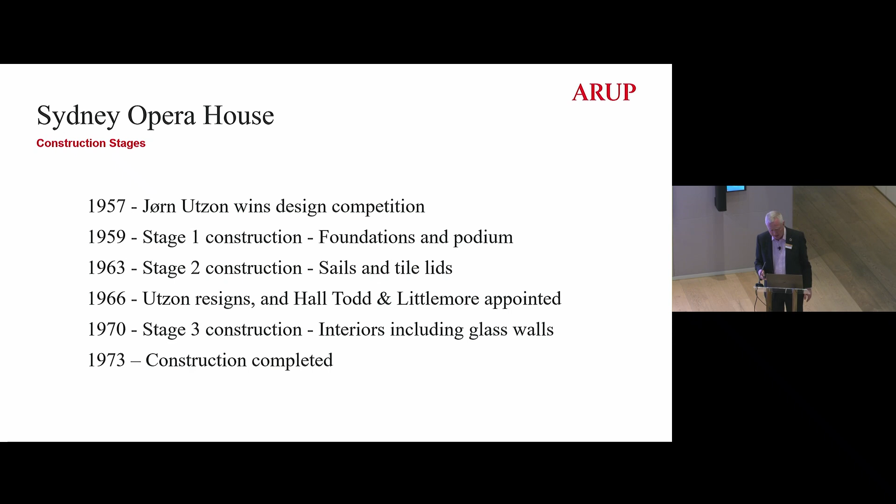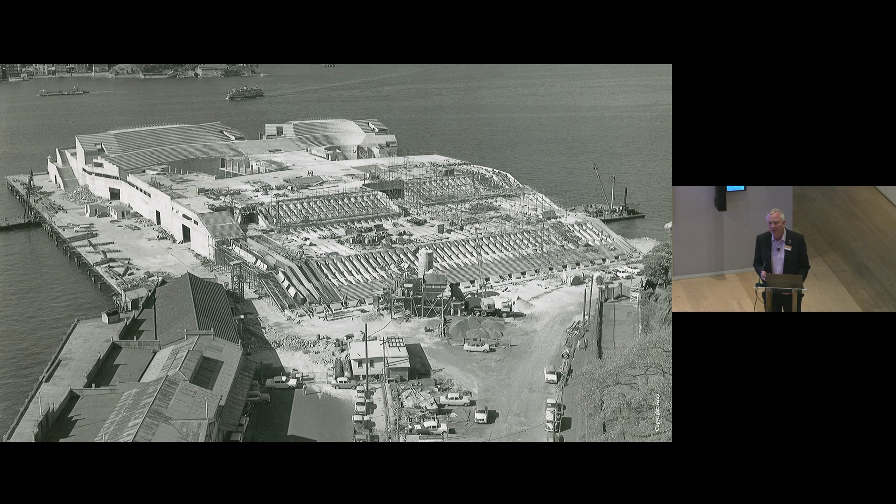Here we see stage 1, the monumental podium, if you like, on which the Opera House is mounted. It's a fantastic, I think, bit of design and architecture in its own right. The whole of the Opera House is sculpted out of this podium and sits, nestled in this massive flight of steps. The construction of this was by Lend Lease, then called Civil and Civic. As far as I know, the construction went reasonably well.

There's nothing I've heard in particular about stage 1, except that it took the attention of the design team away from designing stage 2. They were so concentrated on all the issues that come up through a live construction site, that perhaps the progress on stage 2, the sails, was not as rapid as it might have been.

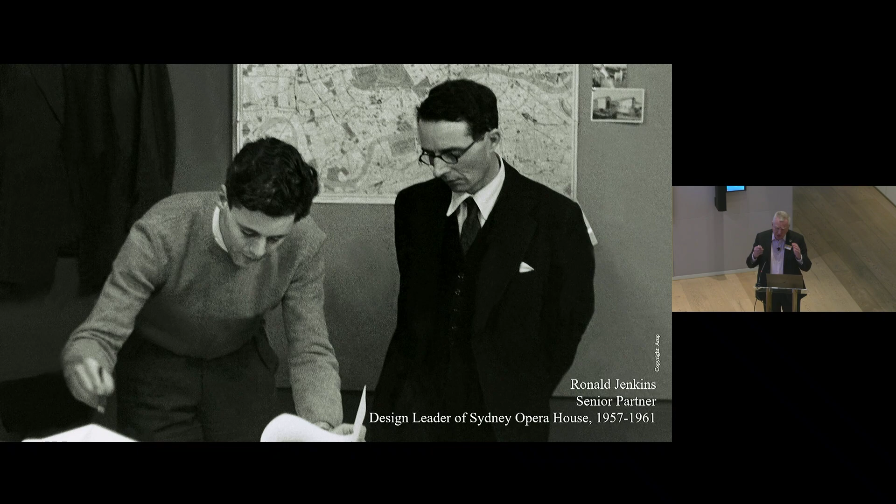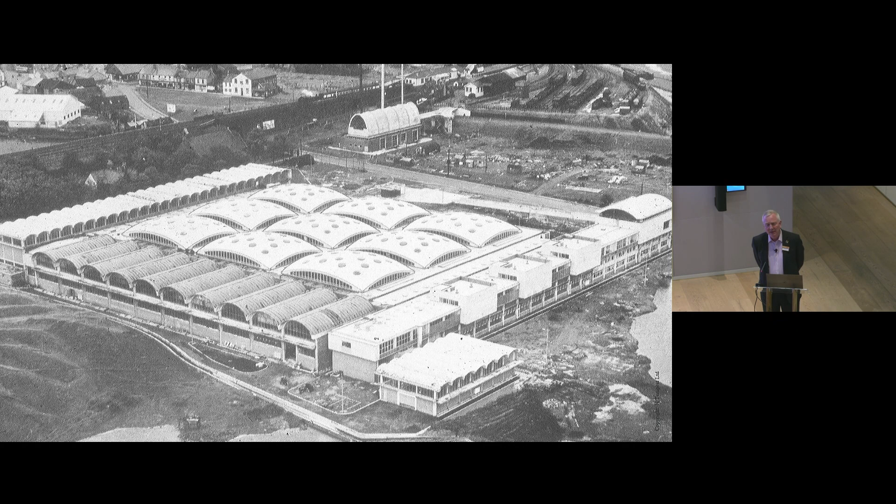Stage 2 was initially designed by Ronald Jenkins, you see here, with another future chairman, Povl Ahm, another Dane, working with him, on the basis that the design should have been a lightweight concrete shell, such as those that Ronald had designed at Brynmawr Rubber Factory, for example. It was quite a common, if you like, architectural engineering approach at the time to make things out of thin concrete shells. But load testing of a polycarbonate model down at Southampton University showed that actually this particular design, or the shape of the design at that time, was not very amenable to shell theory.

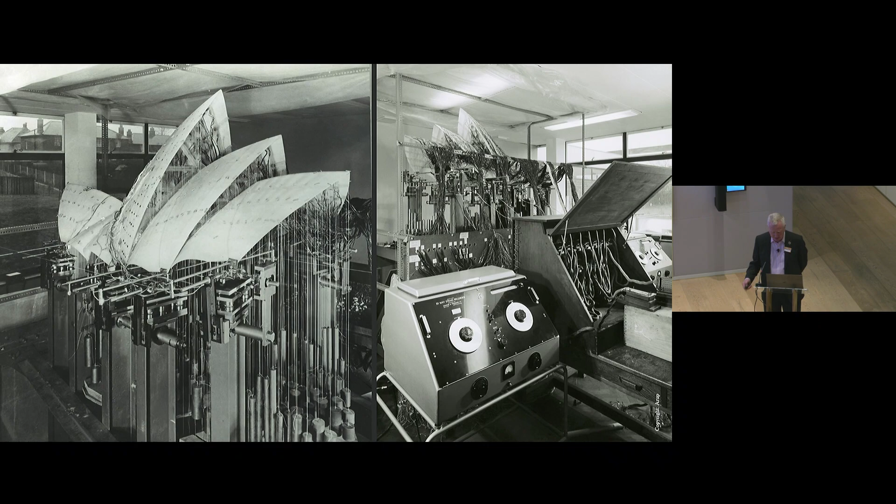And if we look more closely at this wind tunnel model, you can see that the sails at the top are relatively flat, and then they increase in curvature as they come down to the base. All the force is concentrating into that area where it's also being bent round a corner, which basically is not membrane action or shell action. So essentially it just doesn't work. This form does not work as a concrete shell.

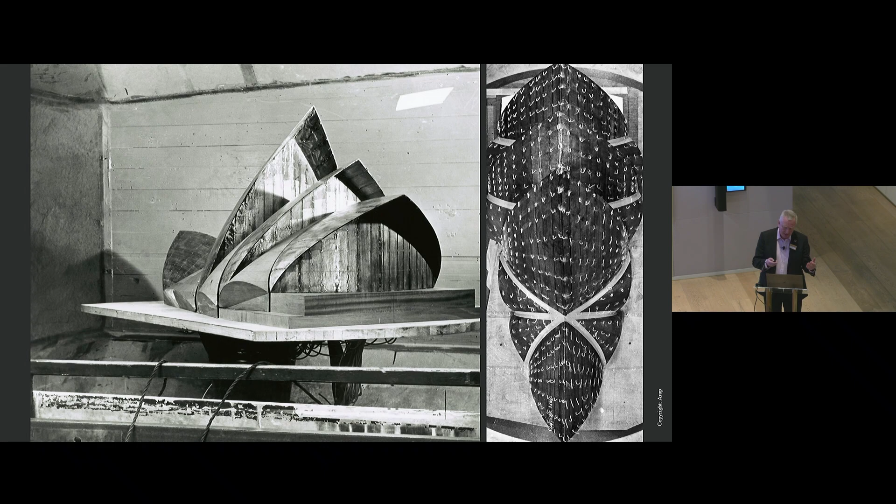And we can see that on this historical, this was published in 1973 on completion of the project, showing the sort of evolution of the design. This is the first of 2 pages, but I'm only going to show you the first page. Top left, originally that form as a single shell, rapidly developed into a ribbed shell to give it bending stiffness and strength to deal with that corner. Even that was insufficient, so it became a double shell, bottom left.

And that continued until 1961, at which point even that avenue was seen to be a dead end, and Ronald Jenkins left the project, and that was when Jack Zunz was brought back from South Africa to lead the team. His preferred solution was actually a steel space frame. You see in the top right, first 2 images clad with concrete, and as some members of Foster and Partners here might recognise, that was an inappropriate architectural resolution of the desired outcome. And so the bottom right, the idea of precast concrete ribs instead was adopted.

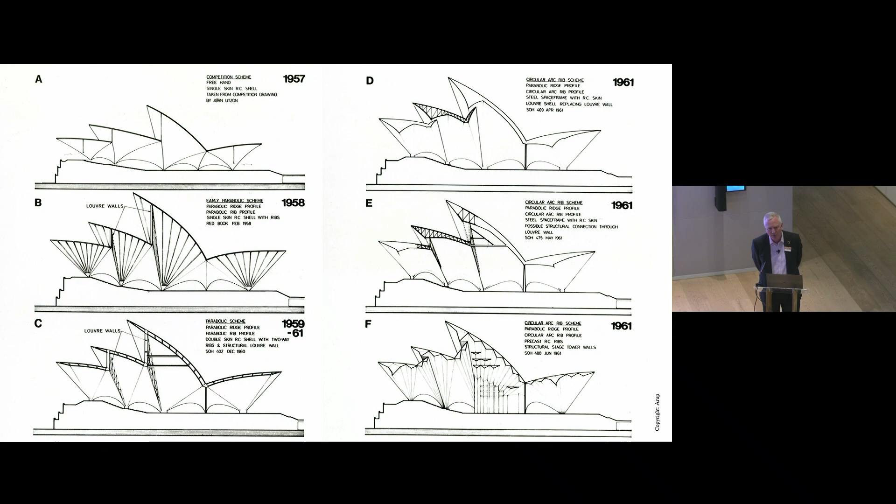There was some controversy over the geometry of the Sydney Opera House sails as to who did what when. And this accurately, I think, says that on the right-hand side, circular arcs were being used, by us at least, to describe the shell, but the ridge line was a parabola, so it wasn't yet what it became.

When it became a set of precast concrete ribs, it was a confused structure in that it wanted to work in bending as a set of ribs and in shell action still as membrane forces developed between the ribs. And this was a difficult thing to calculate by hand. A shell can be calculated mathematically, but this combined bending shell was not amenable to straightforward hand calcs. So we resorted to the computer for the first time.

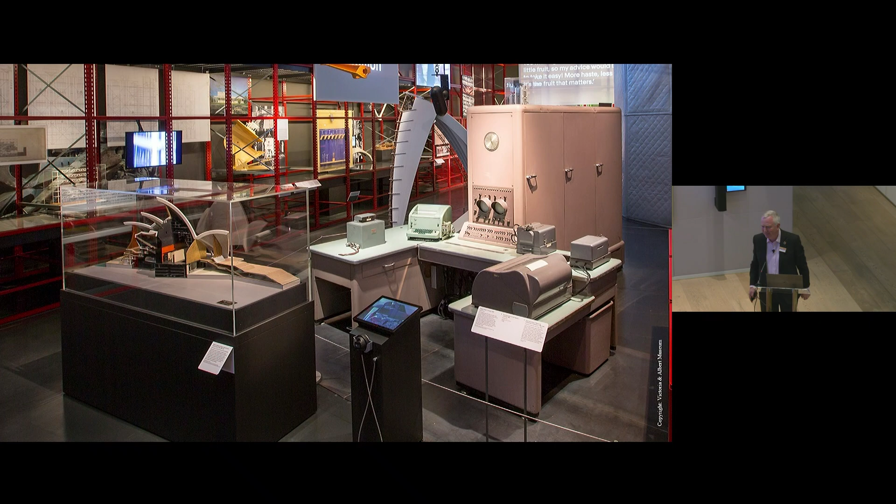The capacity of the computer couldn't do the whole calculation in one go, so one program did the bending calculations, and one program did the shell calculations, and then they were merged, if you like, to give the final outcome. And then in the middle of 1961, we get the eureka moment when Jorn decided that the whole geometry should be cut from a single sphere.

And that actually resolved everything else, because we already had precast concrete ribs. We now had a geometry that was amenable to construction and to repetition and to understanding, which I'll talk a little bit more about. But I'll hand over now to Jorn and Jack Zunz talking to Ingham Ashworth, who was a professor of architecture at Sydney University. He was one of the judges on the jury of the original competition. He was a technical advisor to the Opera House during the whole design and construction process, and was one of the first trustees of the Sydney Opera House after completion.

So each element of the sphere has been separated as a unit away from the whole so that it can be pre-made, prefabricated, and then assembled together. Now, each of these elements is identical for the whole entire roof. Coming back to the orange again. Coming back to the orange, yes. You cut up each slice of orange. You can actually make a whole sphere of this, just a part of it. Yeah. This is only part of the sphere, yes. And the difference being, if you look at a member here, or an element there, it's exactly the same element, except that the one is longer than the other.

Now, here we can see how one element will be taken away from the whole. Now, we're going to make these elements by precasting. They'll be concrete, they'll be hollow, and they'll be precast on the ground, probably on the site, in small pieces, yes. And these pieces, this is just to illustrate, these are the pieces, they're somewhat out of scale. Each will weigh 10 tons. And at this stage, of course, we have to try and collaborate very closely with a contractor who will play a most important part in the design team.

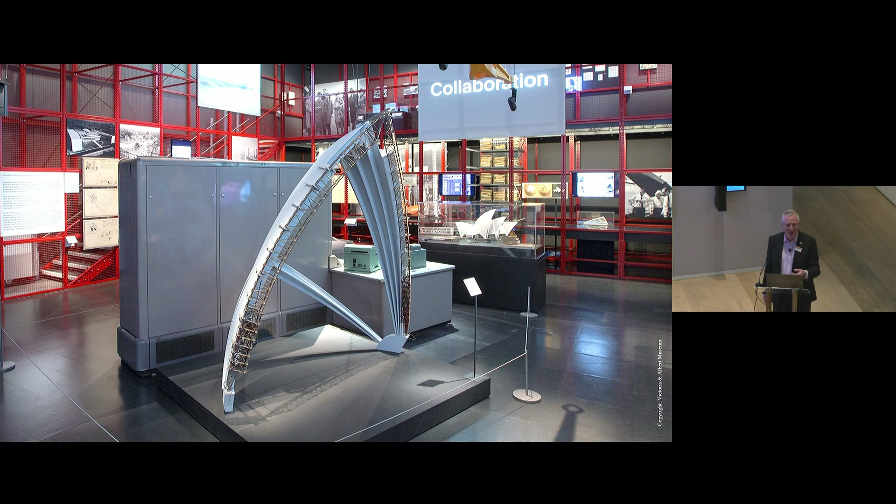There were 8 of these used, 4 to the south and 4 to the north, that followed or led the construction. And that was a phenomenal piece, I think, of creative design from the contractor to help build the project. And to show how things were being done together, this sketch is actually by Arup about the construction process, using the information that we gathered from Hornibrook and the approach. And the whole thing is set out there.

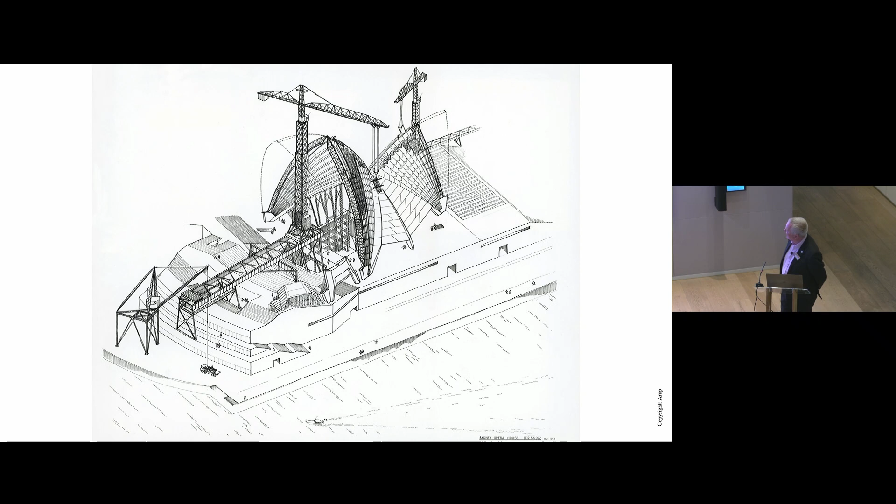You can see pieces are made actually off camera, if you like. They're brought around; the little truck at the front there is bringing a piece. It's lifted up by the derrick crane. It's then going to be lifted by the big crawler-mounted, rail-mounted hammerhead. The largest cranes in the world were imported specially to do this job, and then lifted into place between the erection arch and the existing structure, the structure built to date.

And here you can see, in reality, that's exactly what happened. There are 3 of the big cranes, one to the south doing both halls, and then one for each hall to the north, who sort of built the building, then gradually retreated out of the picture, if you like, and left behind the completed construction.

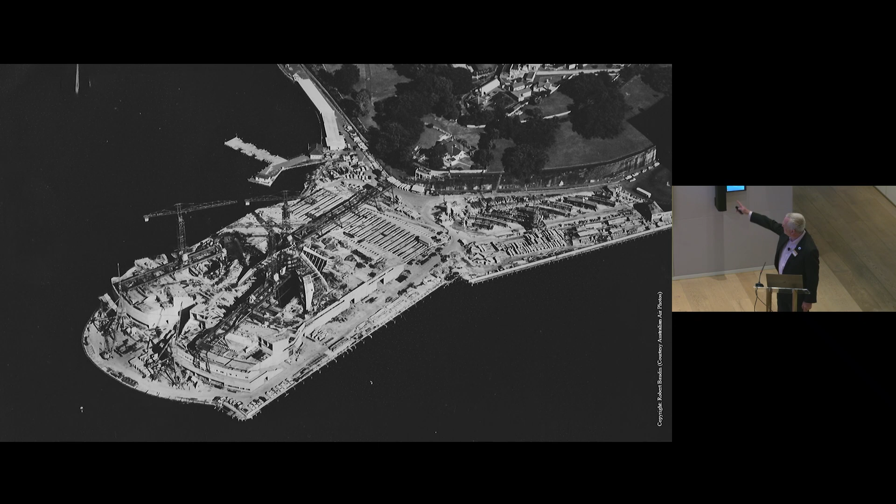And you can see in the right, that's the casting bed. So the actual making of the pieces was also done off-site, but on-site, if you will. It's not on the site of the building itself, but adjacent, made in those beds, stored all the way around the edge of the site, and then lifted into place.

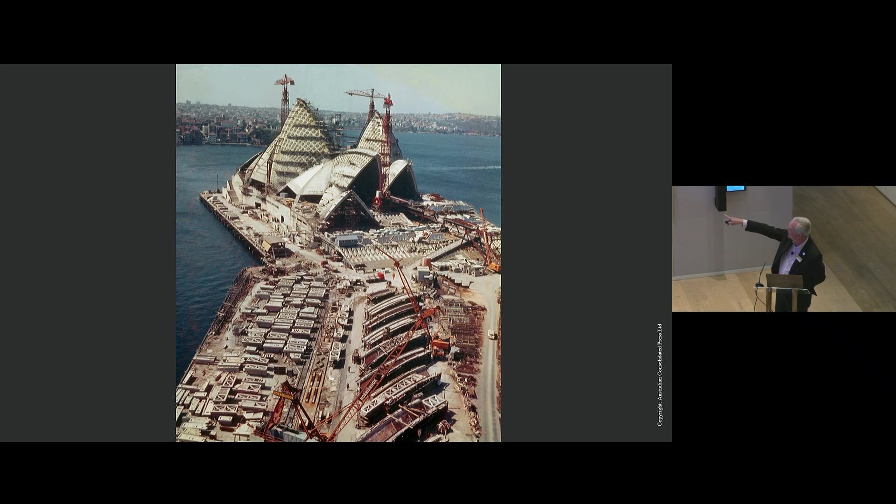And this later shot, it's the same thing now looking from the south. So the casting beds, the bottom right, the storage yards, bottom left, all up the side of the building actually, and then lifted in either from the north or from the south and put into place.

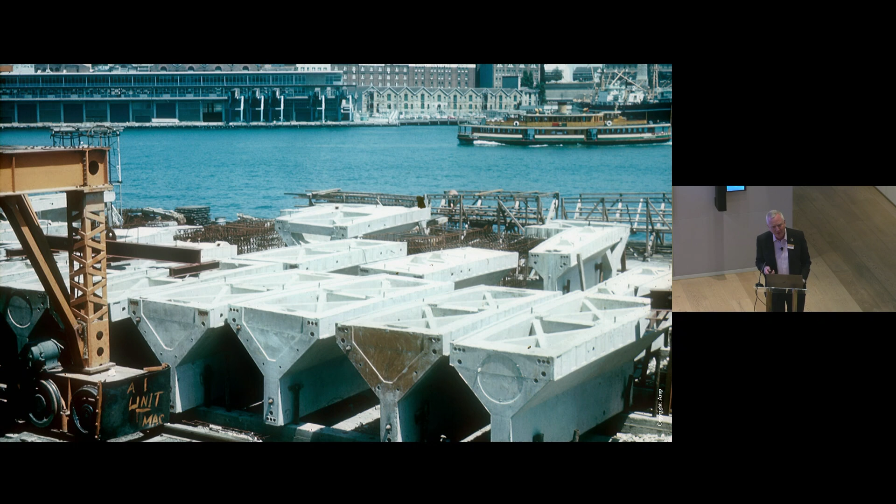So these are the elements. Precast concrete, match cast. So they were cast typically in 4s, each one up against its neighbour, because the joint between them is going to be filled with only 3 millimetres of epoxy. So each one has to be exactly mated up to its neighbour to create that 3mm joint. And in fact, for the next batch of 4, number 4 was taken out of the first bed and was used as number 1 in the second bed to make sure the matching carried on all the way up the rib.

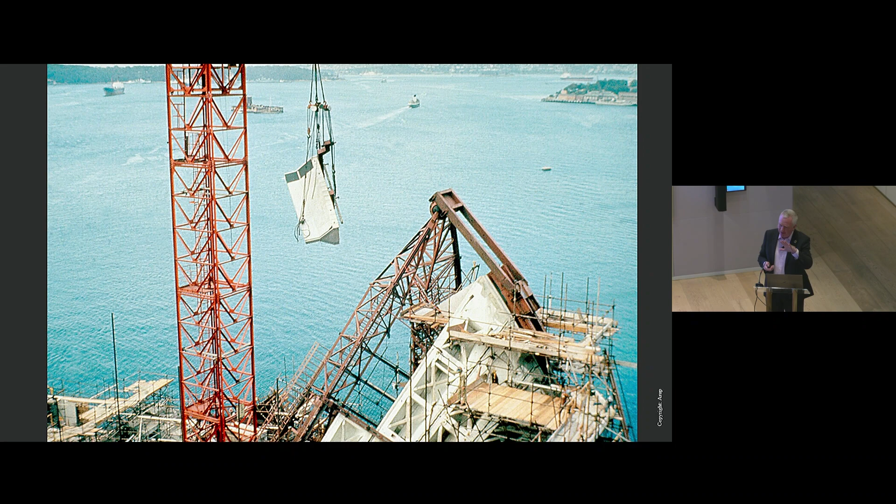Here we see one element, one rib piece being put into place. You see on the left the construction arch with its wonderful spherical bearing at the top being mounted off the top of the ridge beam. On the top of the piece, which is sort of behind you in this camera shot, are 2 steel strongbacks which support it initially, and they span between the existing construction, the rib before, and the erection arch which leads the way, and they hold the rib temporarily in place.

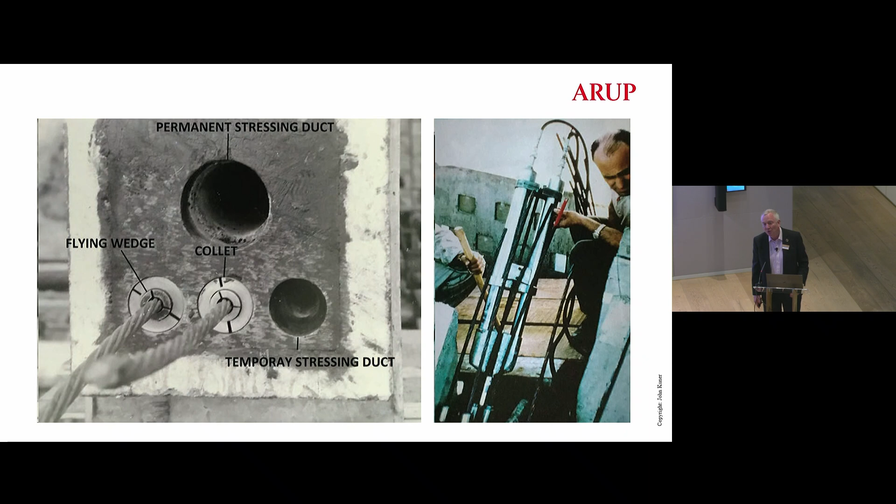And then the rib is post-tensioned. The epoxy is squished, if you like, and these high-strength steel strands are threaded through temporary collets and wedges and stressed time and time again as you extend the arch. So that jack on the right with a double piston arrangement that allows the tendon to go through it and continue was invented specifically for this project. In fact, the whole idea, I think, of the flying wedges and collets that would grip the strand and then release the strand again when it was pulled from further up were also designed specifically for this project.

There was one deficiency in the erection arch, which was it was much more flexible than the concrete ribs that had already been built. So every time you put on a new piece, it deformed a little bit. So it was quite hard to decide whether it was in the right place or not. So every night, or during the day, lots of theodolite readings were taken of the new piece being put in.

And every night, a computer program was run at Sydney University, again written by Peter Rice, who you can see on the left here, to try and compute whether it was in the right place or not. And then the next morning, adjustments were made on the ends of those strongbacks to pull it into the right place before it was stressed back and the next piece was put into place. So this was the second use, if you like, of digital computers.

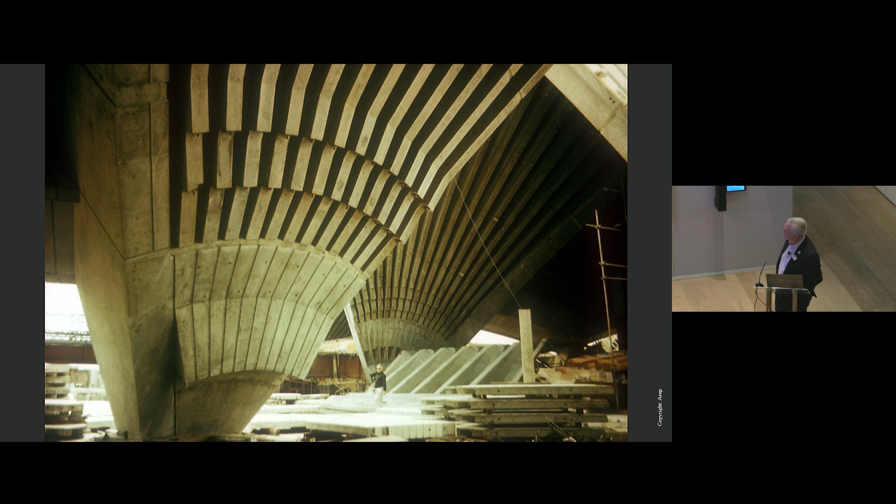I think a very nice touch, if you ever go to Sydney, is to see, if you wander down the 2 main corridors either side of the auditoria, these pre-stressing pockets where all the pre-stressing strands emerge at the bottom of the ribs are still there to see. And Peter would always talk about the mark of the maker as being an important thing to leave behind when you finished a construction project. And this is where he got that idea from, if you like, initially.

So this is my favourite current project. Hang on, it's not running.

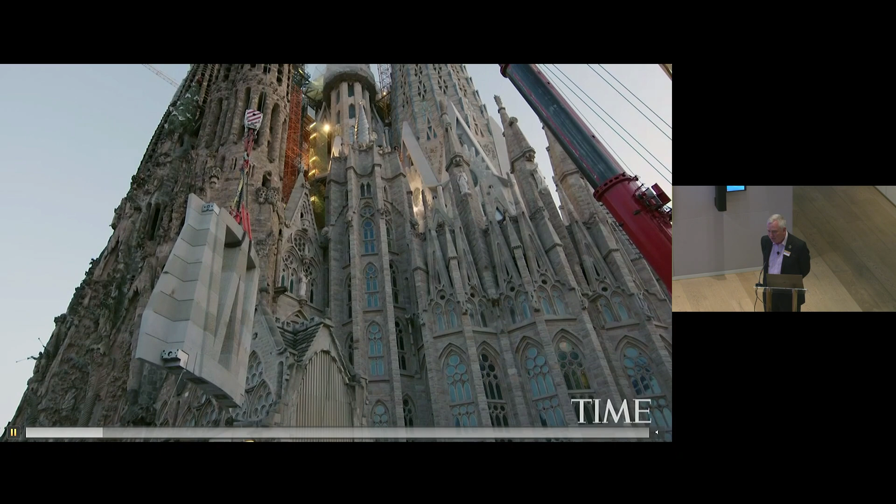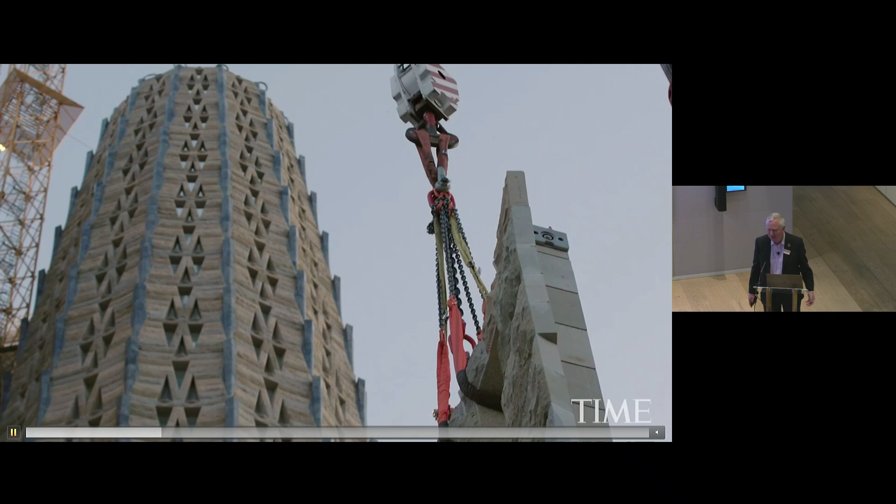Here we go, yeah. So these are the panels we're now using to make the big towers at Sagrada Familia, and they are bits of stone masonry, in this case cut by computer rather than moulded, pre-stressed together with stainless steel rods and glued together with mortar and then erected as complete units. So here we are 60 years later, performing exactly the same process that was invented on the Sydney Opera House.

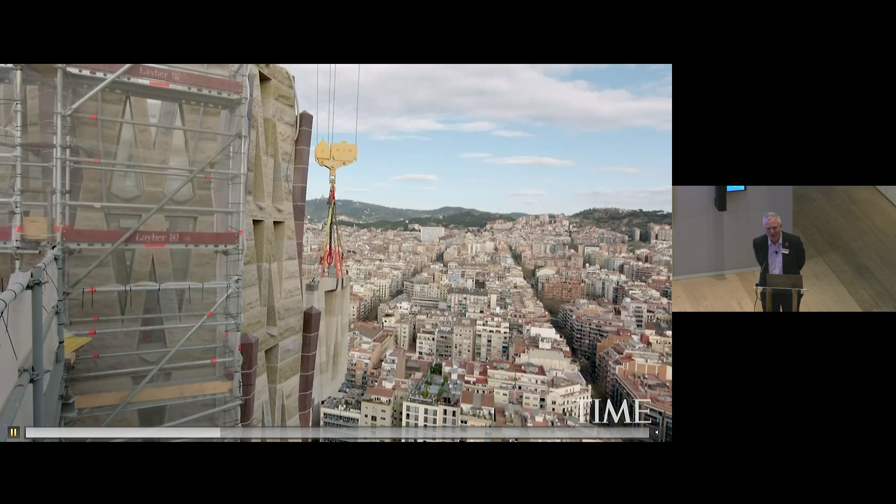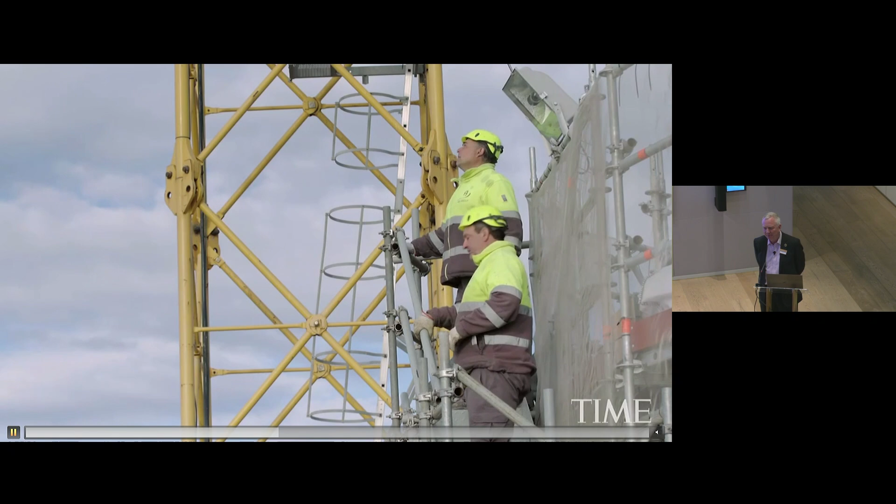And for me, the sort of punchline of this construction, or these modern methods of construction, as we now call it, 60 years later, it's been christened modern methods of construction, is that the whole of the cost of the works at Sagrada is paid for by people who come to watch it being built. Okay. So we've also turned construction into a theatre, into something that people want to see and watch, and not something which is a deficit or a detriment on the community.

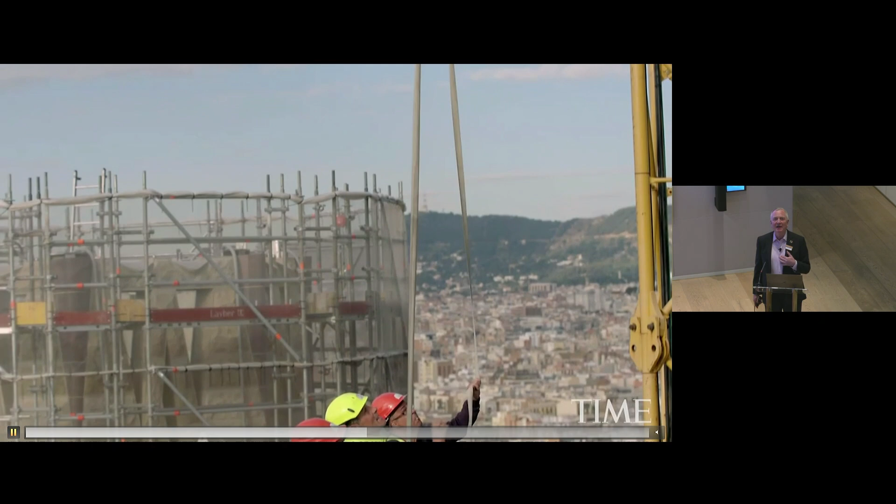And I hold that the building of the Opera House was actually its first public performance, because it was done in full sight of all the inhabitants of Sydney as they crossed the Harbour Bridge and went to and from work every day.

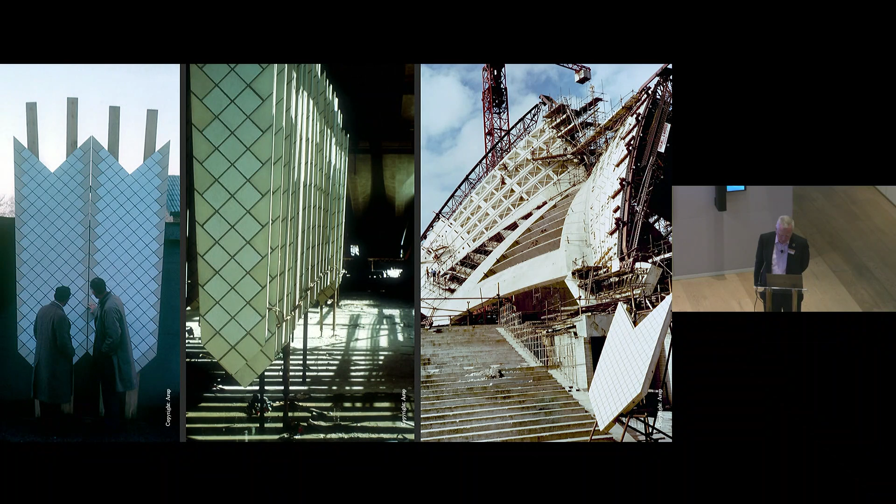The next stage was the tile lids. On the left there you see Jorn Utzon inspecting one of the prototypes of the tiles. I think those are not the final tiles. The border tiles I think are duller than the actual ones which are in the middle shot. On the right, you see one erected on site to make sure he was in the right light. Was it what people wanted? These were then attached, mass-produced.

They were cast with the tiles placed face down in the mould, and then the concrete, which was only 45mm thick, cast behind it, so they were glued directly to the concrete by the concrete itself. Yeah. And then they were erected on the top of the shells using these amazing brackets.

These are bronze brackets that are fully adjustable in every dimension, so that even though the precast concrete is accurate only to about 1 inch or 25mm, the tile lids are there to about 2 or 3mm, so that they're absolutely flush, the panel joints are absolutely even, and they also accommodate the contraction and expansion due to the sunshine during the day and then going away at night, whereas the precast behind stays relatively stable.

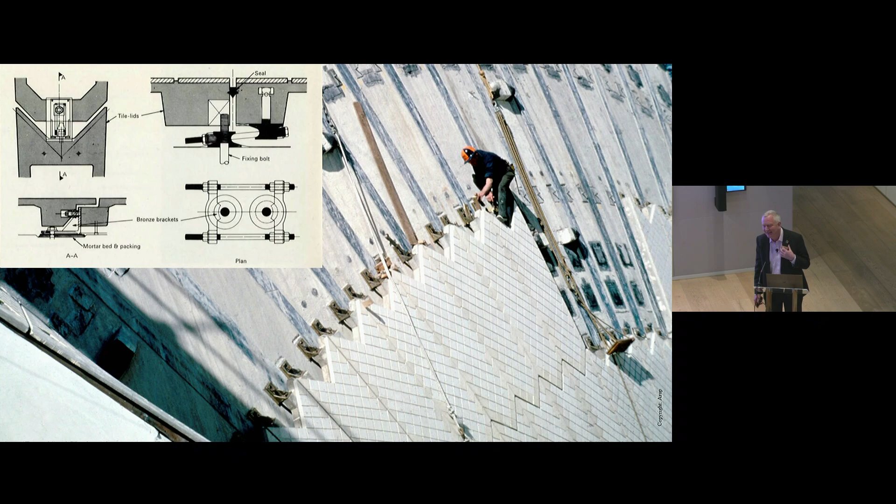And it's all in those details, which are just exquisitely designed. They're better than any detail I think I have seen ever on any other project. And the result is this amazing building, you know, the building that everybody knows, that has become an icon and a representation not just of Sydney, but perhaps even of Australia.

And I love the quote from Louis Kahn, American architect, who said that the sun didn't realise how beautiful its light was until it saw it reflected off the Sydney Opera House. Yeah. And that is what these people created 60 years ago.

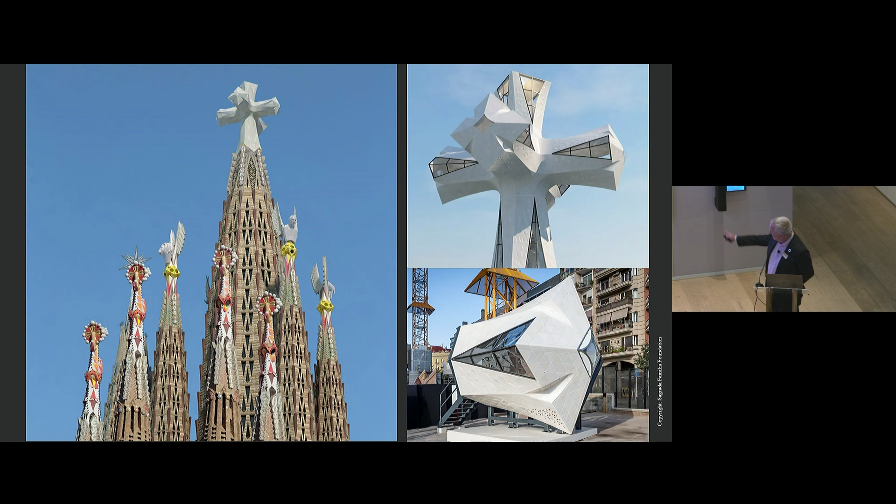And today, this is the pinnacle of Sagrada Familia. There's CGIs left and top, but bottom right is the full-scale prototype that just arrived on site last week. And you can see it's just echoes of the same thing. And again, we are casting the concrete straight against the tiles. And again, the concrete is 50 millimeters thick. So it's a sort of weird repetition of exactly the same thing.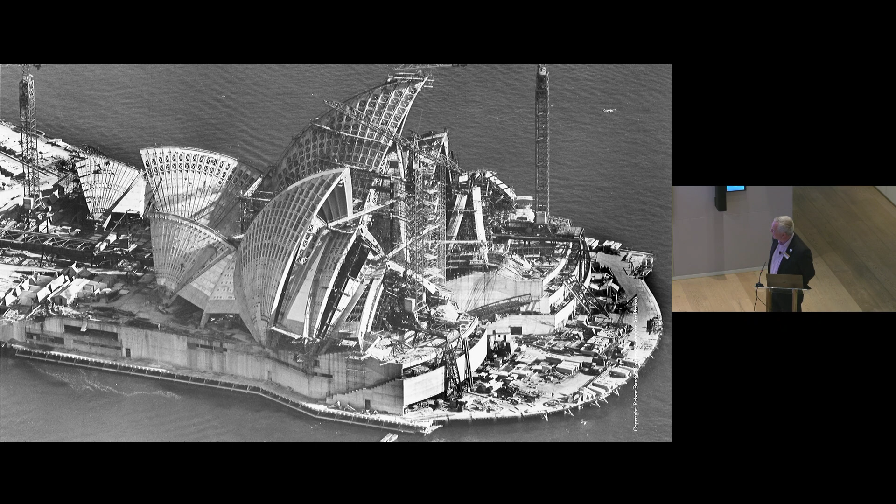So going back a little bit, 1966, Jorn had a major disagreement with the New South Wales government and resigned from the project. He'd completed the design of the whole of stage 2, which was, as you can see, well under construction, but not yet complete. At which point the government appointed a new team of architects, this trio, Hall, Todd and Littlemore, to take over. Peter Hall, of the three, was the designer. He was a very likable man, very nice man when we met him.

And they had this enormous challenge of completing the Opera House between the podium of stage 1 and the sails of stage 2. This contract, led by the architects, was far larger in scale and substance than either of the two preceding contracts. And the biggest task they had was trying to enclose the Opera House itself with these glass walls, because the geometry of the sails and the geometry of the podium, which if you remember was constructed before the geometry of the sails had been determined, were totally unrelated.

And they had to also enclose it in a way that created enough space for the foyers to the north between the two. So it was an amazing task, and again, I think incredible collaboration between architect and engineer to resolve that geometry into something that could be built, could be made, could be understood. Again, computer programs were written from first hand to develop this idea of two cones and a cylinder which shared a common axis, by which the mullions could migrate from one cone to the next cone to the cylinder, all in a single plane.

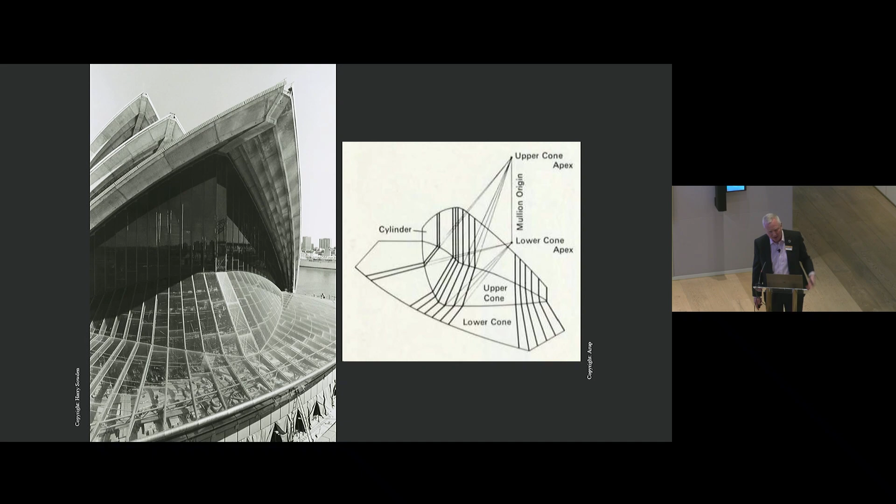The walls were made with laminated glass. Laminated glass had never been used at anything like this scale before. The codes of the time, or the design principles, were that you designed the two panes as independent things, taking half the load each. But primary research by Arup, by a guy named John Hooper, determined that that was correct for dead load, a long-term load, where the polyvinyl butyral interlayer would creep, but it wasn't the correct approach for wind loads or short-term loads, where the glass could work as a composite.

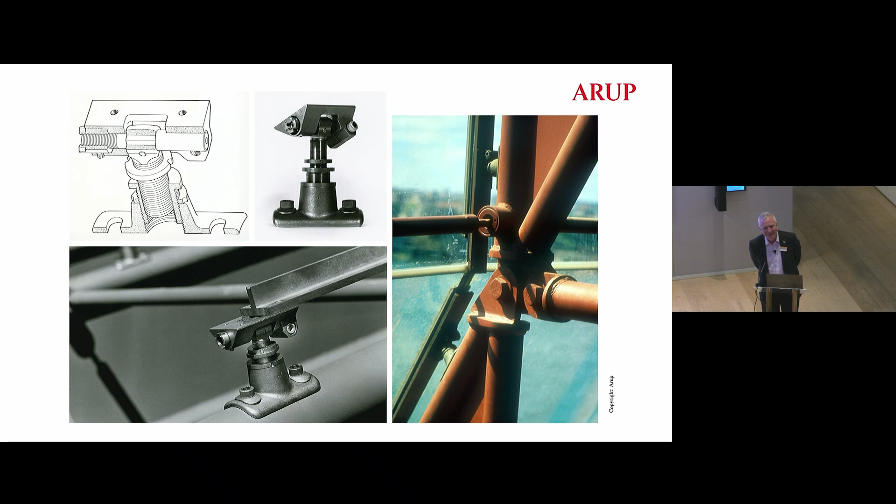So we developed, or Arup developed, codes of practice for designing laminated glass for the Opera House, which are still the basis of the codes used today. So another first invention. And again, the details here to accommodate the difference in tolerance between the facade of 1 or 2 millimeters and the steelwork of probably 10 or 15 millimeters are exquisite. And these were actually developed in collaboration with Hawker de Havilland, makers of aeroplanes, in phosphor bronze. And they're just beautiful, just beautiful.

So again, today, something like the Bombay Sapphire Distillery with Thomas Heatherwick is using exactly the same approach to glass design that was developed back then, 60 years ago. So in the interest of time, I'll bring this to a conclusion, which is, there it is, 1973, opened 51 years ago. For me, there are so many firsts here that it's difficult to break them all out, but there are 9. Integrated design between architect, engineer and contractor, digital computers, modern methods of construction, early contractor involvement. That erection arch was brought to the table before the contract was actually signed for stage 2.

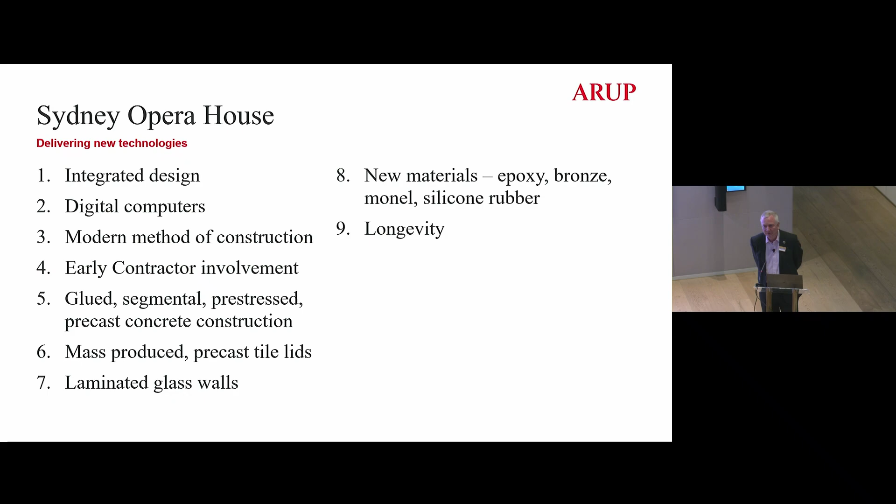Glued segmental pre-stressed precast concrete construction, now used commonly for major bridges all over the world, never been used before. Mass-produced precast tile lids, laminated glass walls, new materials everywhere. Who knew you could build something with plastic in 1960, glue things together? And ultimately, for me, it's about longevity, that when you produce some work of this quality, it carries on and becomes, as I said, the representative icon of not just a city, but a whole country.

It also made Arup. We were good at what we did before that. We worked with some modernist architects in the UK and were producing good stuff. But this project took us onto the world stage. And more importantly, I think, it gave the people who worked on it the confidence and the courage to break with convention and to dare do things which had never been done before. And I know I would not be here speaking to you today if I hadn't learnt from those people. They made me, if you like, who I am today. So thank you.

Brilliant. Thanks, Tristram. Get your questions ready for him. He will be open to them later on. But now we have Peter, who's going to talk to us about the transformative nature of the building for society and for Sydney. And so, Peter.

Yes, well, that was such an all-encompassing description. I need to find those bits which Tristram hasn't actually covered. And to a certain extent, my interest is also with the relationship of architect and engineer and what impact Sydney Opera House had on that relationship, and the impact was fairly great. So I'll also start with a picture of Jack Zunz. We were at the opening of the Great Court at the British Museum in 2000. And he came up to me and he said, "I'm really angry. We've got to do something about this."

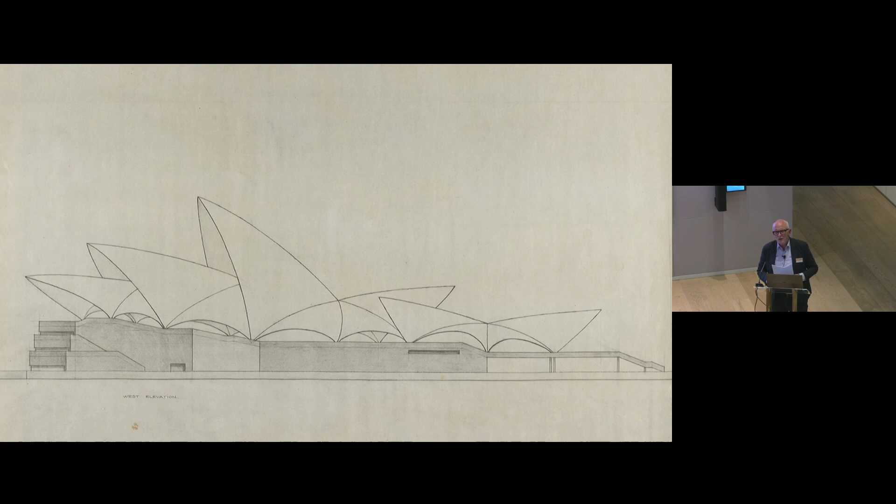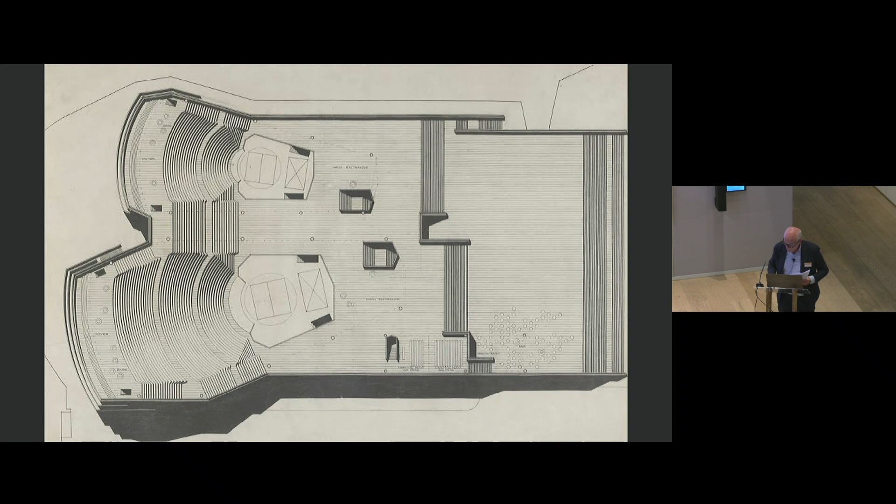So when Utzon actually won the job, it's interesting to see why it had the shape that it did. And this is really quite important in terms of the outcome and Arup's view of the final design: you have the higher shell in, you might say, the middle of the composition, because that's where the fly tower is, and that means that you needed a bigger shell. And if you can remember what it looks like when it's finished internally, it all ended up slightly differently.

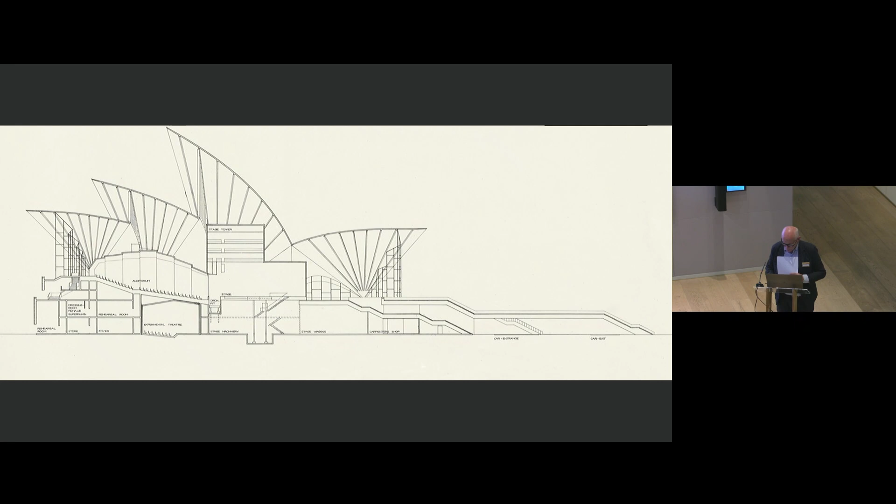But as you saw earlier, your picture is a bit sharper than mine, Tristram. But anyway, this is the podium which Utzon had designed. He had been inspired by Mayan architecture, and he saw this as a plateau which you would gradually walk up, and then you walk up the stairs into the theatre itself.

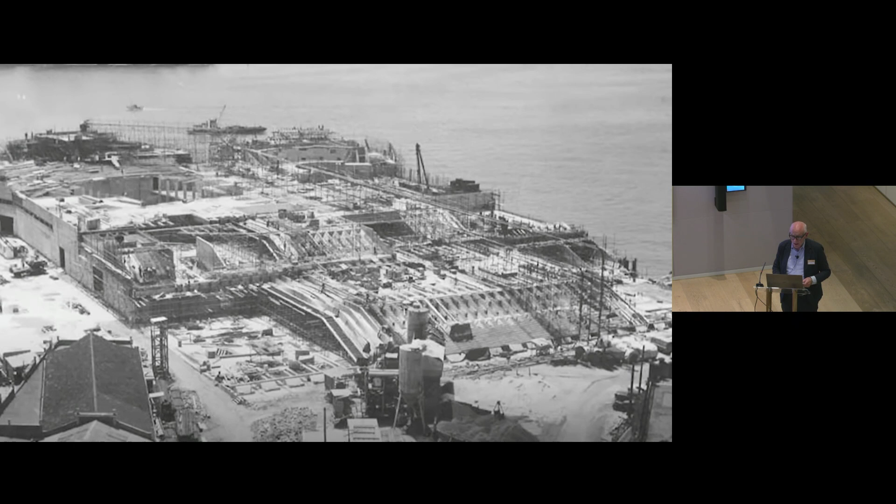And one of the interesting things about this is that it does entail one of the, you might say, great pieces of collaboration between Arup and Utzon. They were both Danes, as you probably know. As soon as Utzon had won the competition, Arup wrote to him, which was seen in those days as touting. Now you would call it marketing, but then it was touting. And Jack was always a bit shocked when he told that story.

But Utzon had already been told that he needed somebody like Arup or Christiani Nielsen, one of the two, because amazingly, when he put in his doodle for the competition, he had not had any engineering advice at all. So he started without an engineer, which engineers obviously point out doesn't work. So as we heard, the three stages were really important: the podium, then the shells, and then the interior.

Now, of course, one of the big issues all along was that the costs kept going up. It's not unusual for buildings of this scale, but this was a pretty massive increase, partly because the original shell structure was seen to be just 3 to 6 inches of concrete, and the local quantity surveyors costed it at about 3.5 million Australian dollars. But it soon grew, as soon as they got on site, to 10 million.

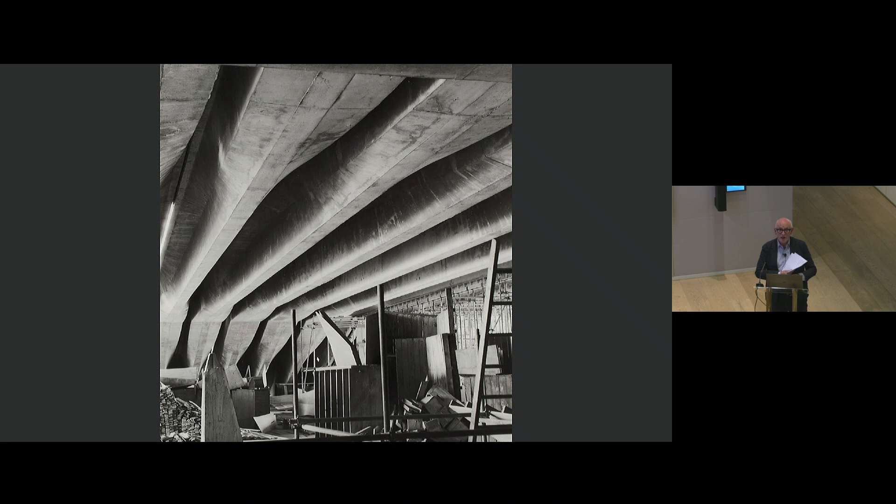And in terms of doing things in full sight of the people of Sydney, the tops of some of the columns had to be blown off with dynamite, and they managed to do that when there was hooting going on in the harbour and other noise which would mask it, until a lump of concrete landed on commuters' cars driving past on the Cahill Expressway, so their cover was blown, as it were.

But I think one of the very fascinating things about this project is the relationship between Arup and Utzon. At that stage it became perhaps almost a father-son relationship. And Arup believed, I think all the way through, that in Utzon he had found the perfect architect with whom he could collaborate in his own personal quest for total architecture, an approach that dissolves the disconnect between engineers and architects.

It's something he'd been seeking his whole career, and is the basis of the collaborative attitude of Arup's, and everyone reads the key speech when they come here. Still, do they? They still do. Good.

So there's a few more drawings, the ones that Tristram showed, but basically there are a lot of iterations at the start. So the key thing about these is that RSJ, and in fact the whole team in those days, believed the architect was the leader of the building team. And so he had done this design. They knew they had to calculate ways of making it stand up. But what Utzon wanted, they thought they had to stick to.

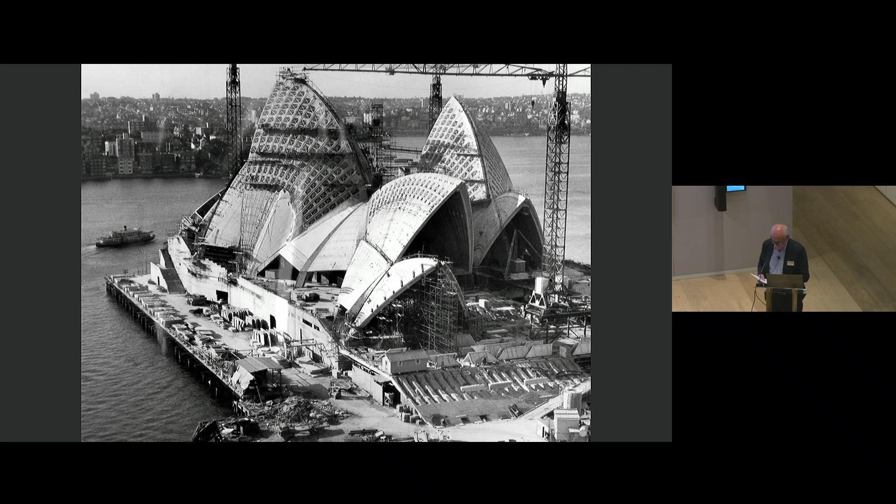And Bill Wheatland, who was with him in the meeting and was number 2 in the office, says Utzon said as they were walking out, "Don't worry, I bet they'll come running after me." But they didn't, and there were huge protests at the time, local architects and students, and the response to a lot of that is quite important as one goes forward, because there were some who suggest that Arup should have resigned at the same time, but their contract was with the government, and Jack Zunz said there was no way we could walk away from a contract where the client had treated us so well.

And so Utzon left Sydney, never to return, never actually to see the building at all, and they needed to find a way of continuing the design. And there was a lot of discussion between Ove and Utzon as he was packing up to go home. But actually, although they had this great relationship, the two of them didn't actually meet again until 1978, when Utzon won the Royal Gold Medal at the RIBA, and they shook hands and exchanged pleasantries, and that was all.

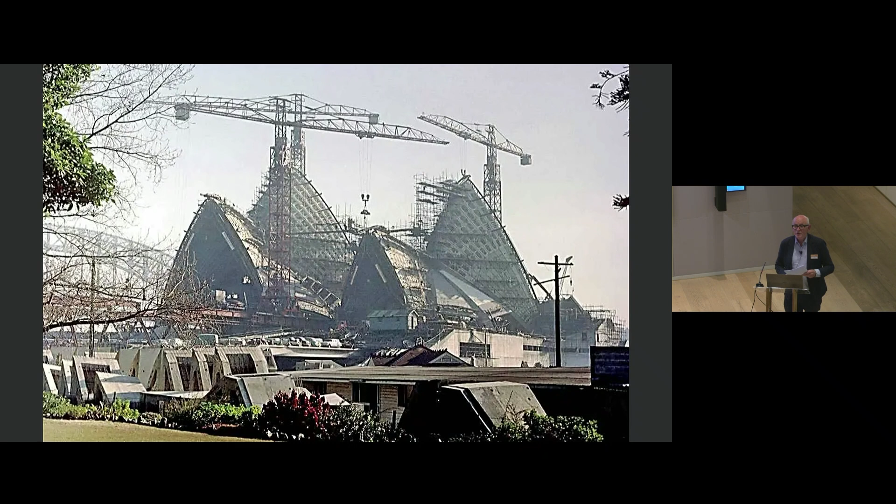But at that time, and this is a picture taken by Peter Hall, the architect you heard earlier who took over, they dominated the place. There were some people who thought it ought to just be left as a massive sculpture, and it would have looked very dramatic. But instead, Hall, Todd and Littlemore.

Hall was a very bright young architect and was selected by the government architect as probably the best person to do the job, and Hall and Littlemore were the executive architects. And together they delivered, as you heard, the huge and very important glass wall.

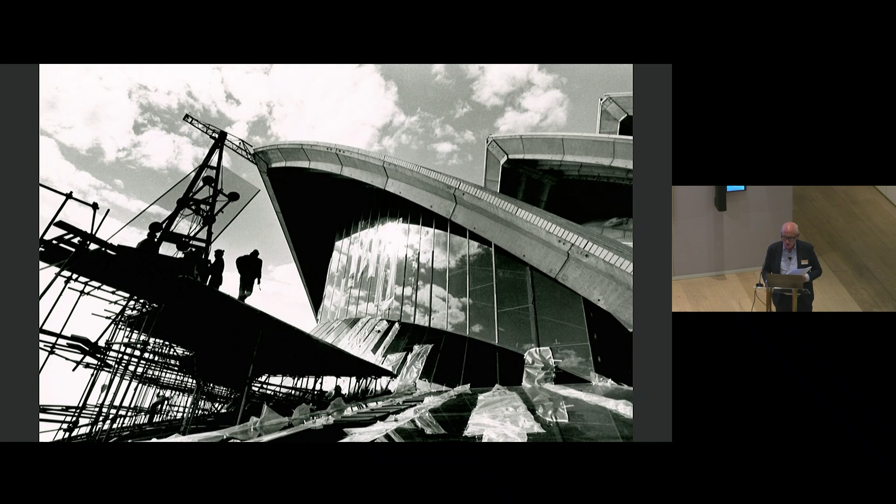And also they had to design the interiors, for which Hall went round the world looking at other concert halls, talking to acousticians, looking at buildings like this one, the Kunio Maekawa Saitama Concert Hall, which had a very similar sort of feel to some of the models that Utzon had done for his selection of interiors.

But Hall just had to really imagine what Utzon wanted, because he believed when he started work that he was just going to take over from almost a fully completed design. He was just to carry out Utzon's designs, and there would be plenty of drawings to show what Utzon wanted to do. But when the architects went to pick up the drawings, the cupboard was bare, and the Utzon architects had actually taken away about 5,000 drawings, and they didn't re-emerge until 1973 after the building was open.

So really, Hall was starting again, and the few drawings they could find were deemed as preliminary, but it didn't affect the work that was going on site at the time, because, as I said earlier, they hardly did any of the drawings at all. Arup had done all the drawings, so that work continued on fairly well. But one of the key issues was that there were no drawings to show how many seats the theatres could actually contain.

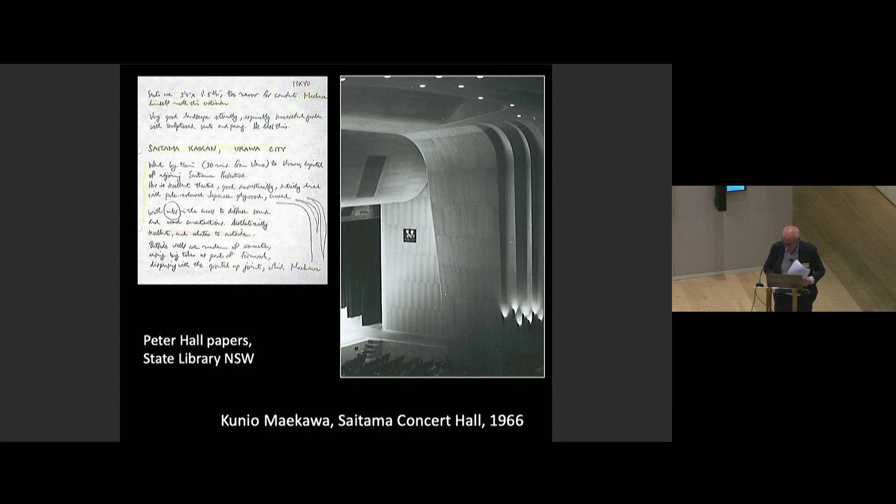So then things get very interesting in that there was an exhibition which took place in Sydney in 1994, which was called Unseen Utzon, and somebody had turned up this model which shows what Utzon was thinking about how to fit in the hall under the shells with this large plywood swooping roof ceiling, and as you can see, the fly tower is still there, and he is unable to actually get the number of seats in he needed. But the supporters of Utzon thought that they hadn't counted the number of seats properly.

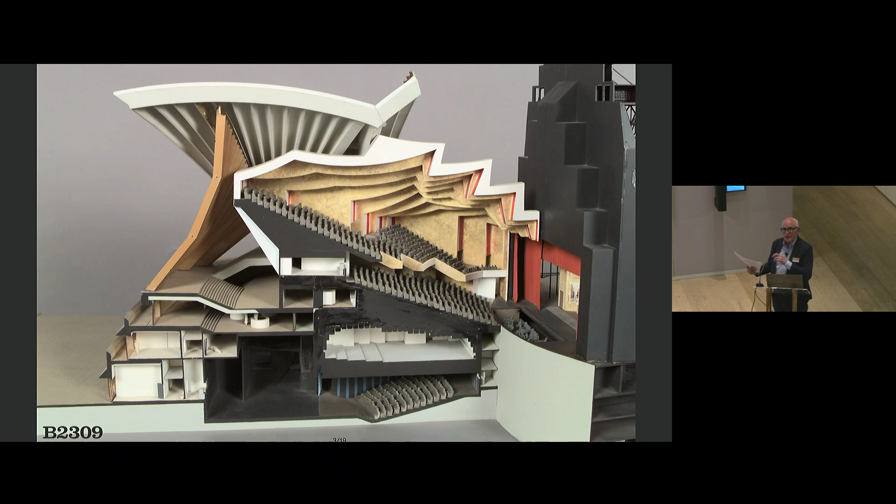And so they started to do that, and there was Richard Johnson of JPW Architects. He was the consultant architect. He got in touch with Utzon. They developed a document of design principles, which Utzon was very satisfied with, of changes that would happen over the lifetime of the theatre, and became particularly relevant with this latest improvements and changes which took place leading up to the 50th anniversary, which we're celebrating now.

And so Johnson went to visit him. I don't know whether it was in Denmark, but at that time Utzon was spending a lot of time in Can Lis in Mallorca, which was two beautiful houses he'd built overlooking the sea. And Johnson said he read it slowly, looked up and said, wouldn't it have been marvellous if the Acropolis had had such a document, which he took as accepting that Utzon liked the proposals. Johnson then tried to convince Utzon to come and visit the building.

They even tried to hire Kerry Packer's jet to fly him there, but he didn't want to go, and he told the journalist Anne Maria Nicholson, I have the Opera House in my head like a composer has his symphony. He can at any time go into the symphony and hear it.